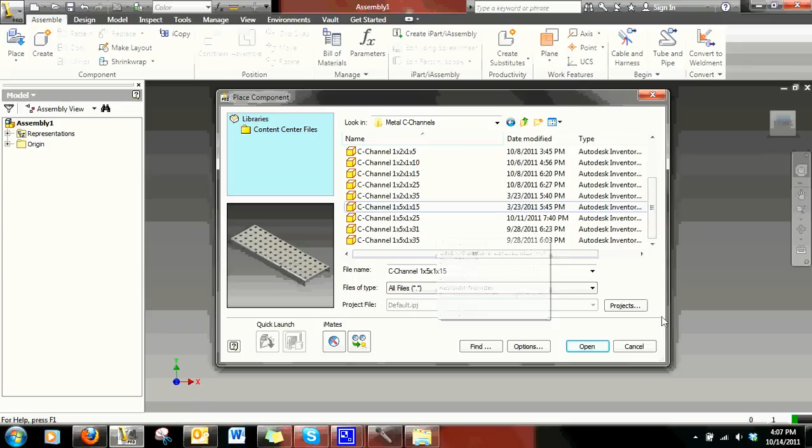Alright, so once you have your assembly open, place two C channels. I guess in this case it doesn't really matter which one, but I'm going to place the large ones.

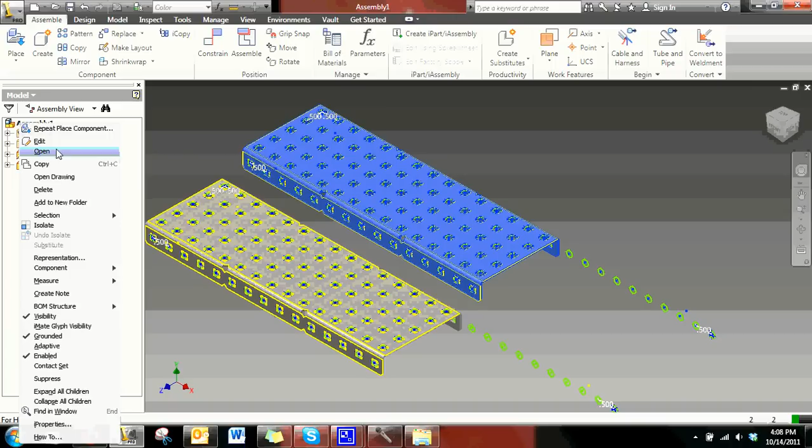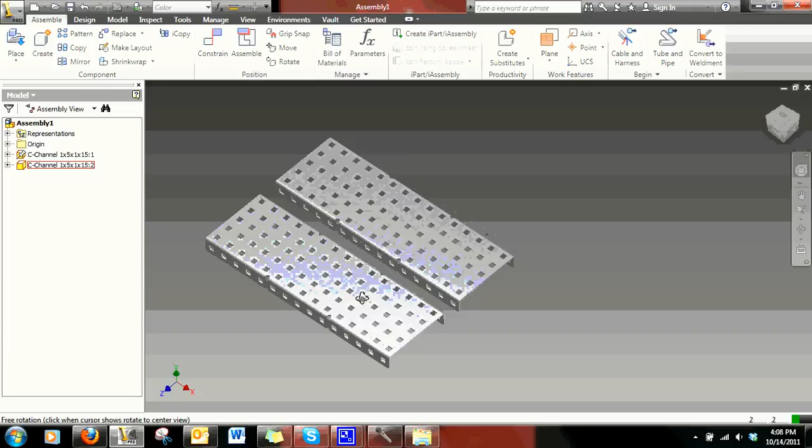So what I'm going to do is mate constraint this face to that. That's the start of the gearbox. And I'm going to ground that piece just so we don't lose our position, and unground this one so that we can line it up.

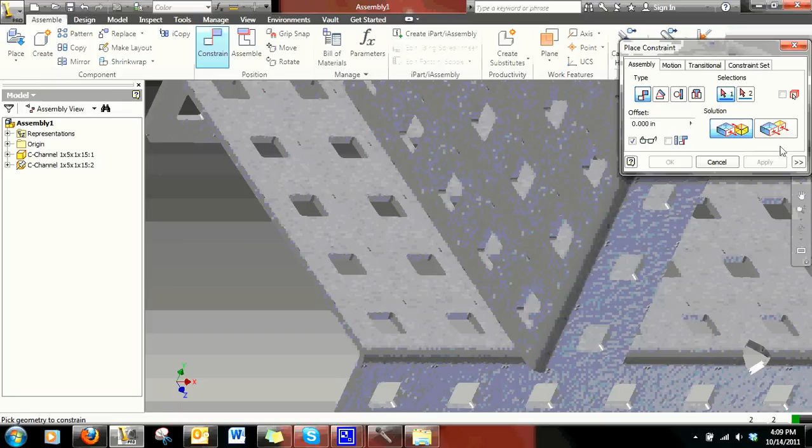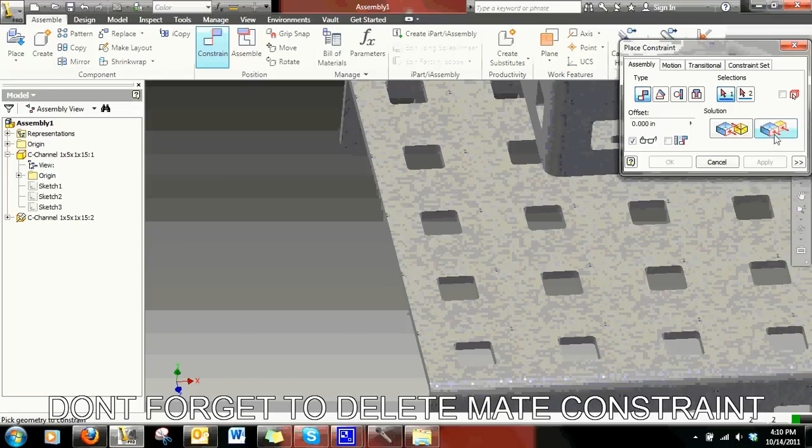So I'm going to flush constraint this. Oh yes, it was mated, so that's why I couldn't do that. So I'm going to delete that constraint now that this one is grounded. And now I can flush that to that. And now they're lined up.

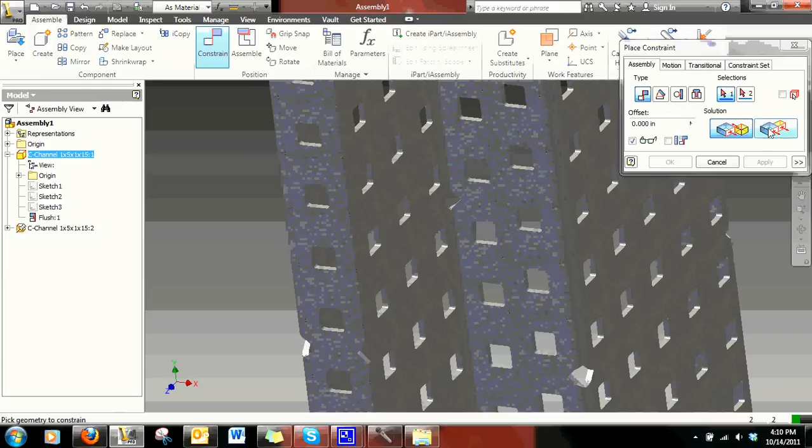I'm just going to flush a few more things before I get started. Alright, now I'm just going to ground it because I don't want to add spacers to get it right.

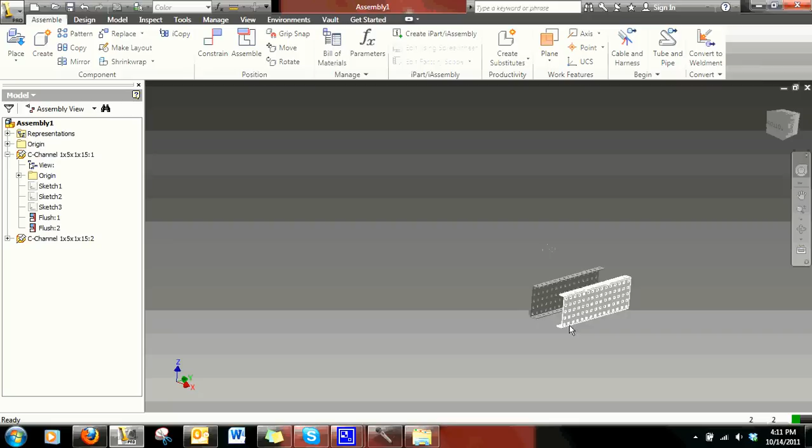But to make gears, sprockets, or wheels rotate around a circular joint, you have to have something circular for it to rotate around. Or you could use VEX's library where they already have all the circular points made, like the center points, I guess.

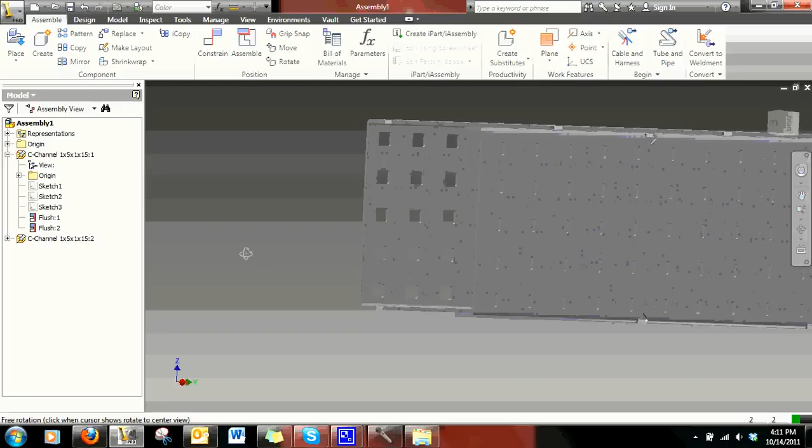So I'm going to turn that sketch back off. But to do that, you add a bearing, or any circular part that you'd want it to rotate around. In this case, I'm just going to use a bearing.

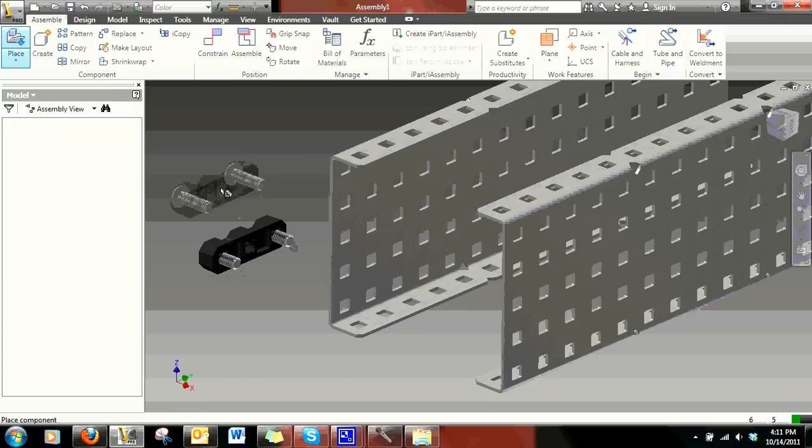Not that one. Alright. So then mate constraint. Then you're going to have to watch my tangent video to understand this next part about your tangent constraint. Okay, tangent constraint this.

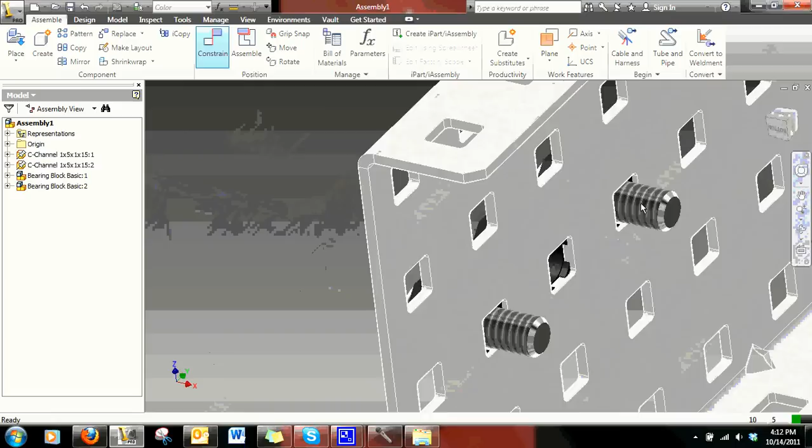So now you have this circular area, I guess. I guess we really won't need this. It's up to you though.

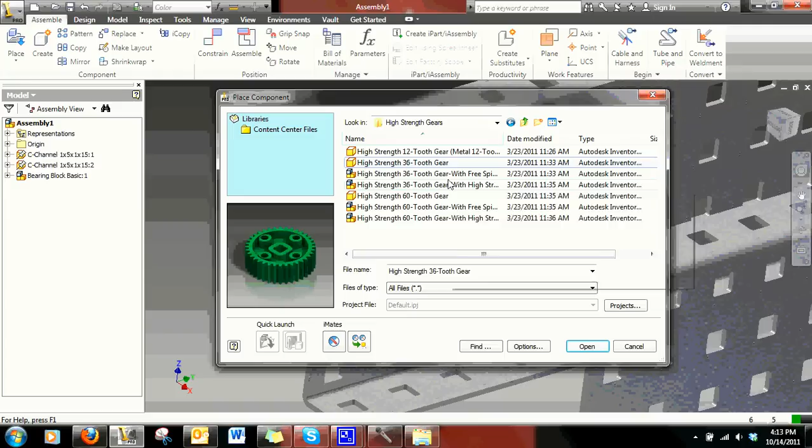So now you want to add the gear. So I guess just for testing, we can add a high strength gear. Well, they have to have the little metal insert. So I guess just high strength 36 tooth gear. Oh shoot.

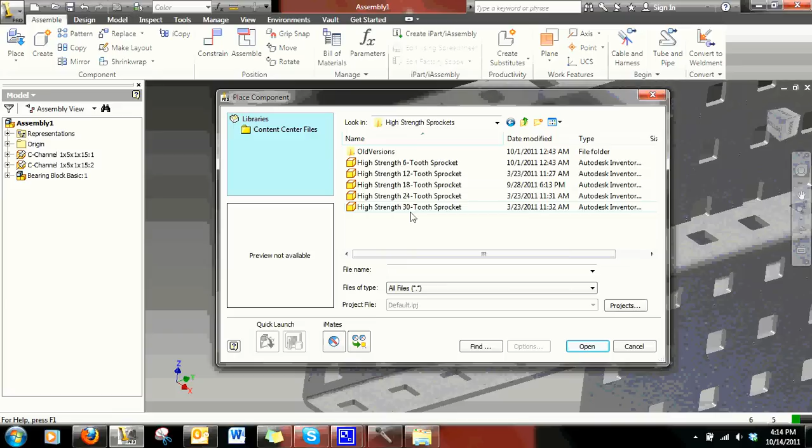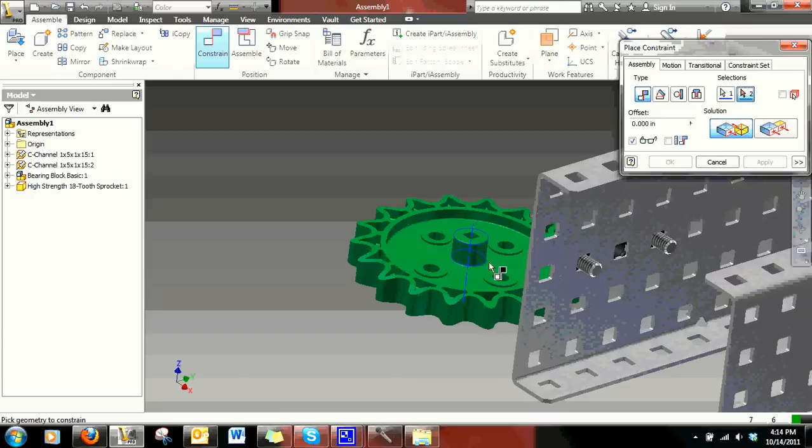Alright, so instead of doing that, since I had problems, we're going to import a regular gear, and I'll troubleshoot that problem later. So just place a sprocket, wheel, or whatever gear you'd like, and then to make it rotate along it, you have to mate constraint the circular part that you would like along with that circular part.

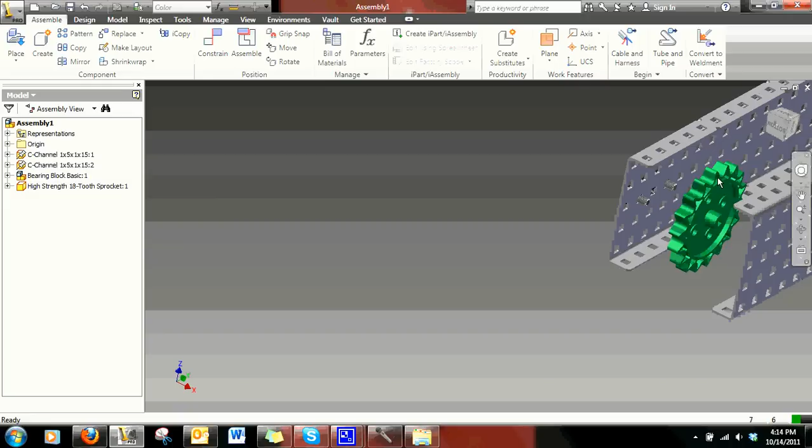So now it can rotate. And then I'm just going to mate constraint this and offset it so that it's not in the way. So now, as you can see, it rotates along that circular part.

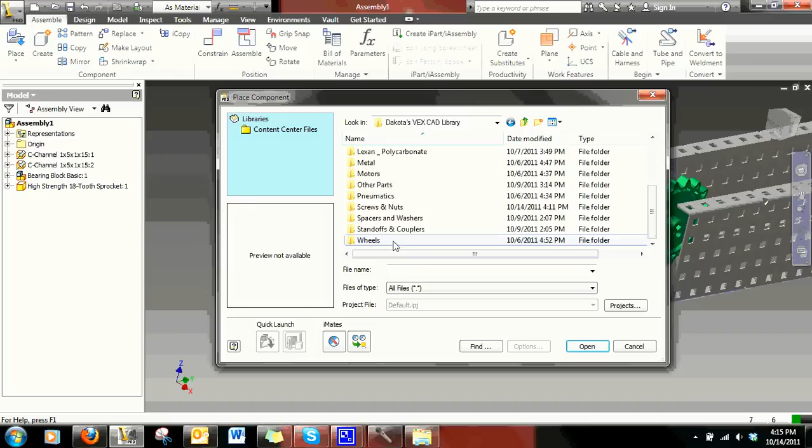Then I'll do a wheel too, I guess. Why not? So I guess just import whatever wheel you would like. Then just delete that.

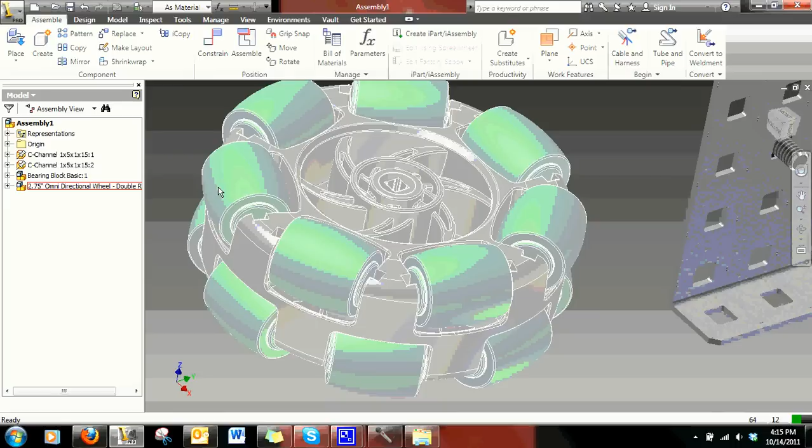Alright, once you have the wheel imported, click on the circular part. In this case, it can be found right there or right there. I'll just choose that one. Mate constraint. There.

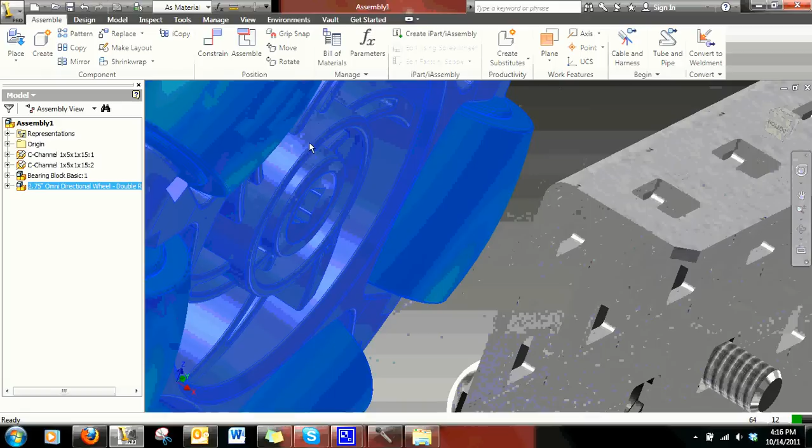And then you can rotate along it. Rotate.

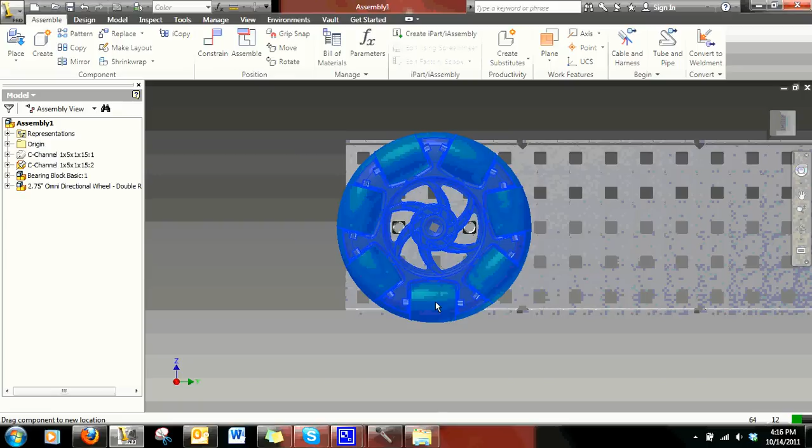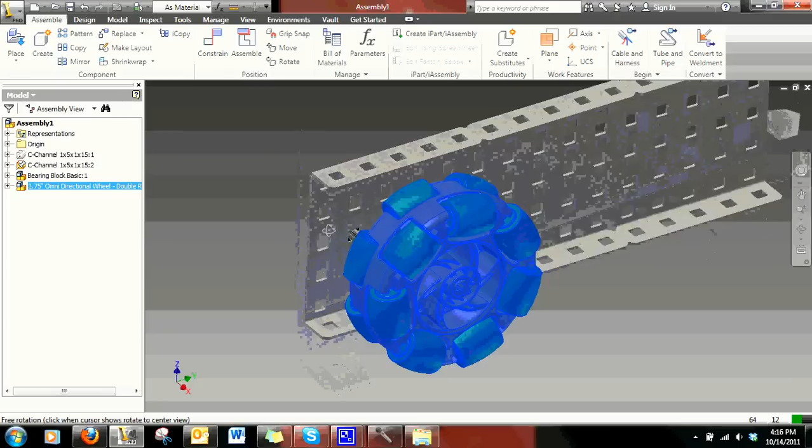So that is always how you want to connect spacers, wheels, gears, and sprockets, or anything that you want to rotate, because if you mate constraint it to the piece of metal, that'll just keep it stationary. You have to constrain it to something circular. In this case it was a bearing, but it could be a screw, it could be whatever you want, really. So there you go.